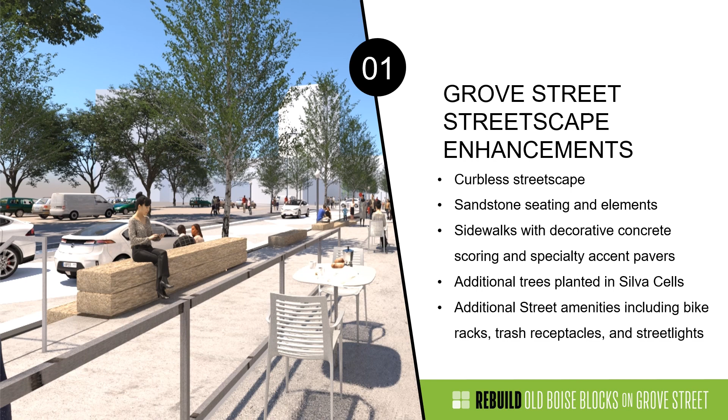We are working in partnership with the Ada County Highway District. We have an agreement with them where we do the construction and they reimburse us for it. In this case, we'll be removing the existing asphalt paving and replacing it with concrete paving. The concrete will reduce future road maintenance—it's going to last a lot longer than asphalt, so we won't have chip sealing and all that kind of stuff, which means a lot less headaches going forward. Concrete also helps reduce the urban heat island effect, which is a good thing these days.

One of the other things we're doing, like you see out here at 8th Street, is what we call a tabletop or raised intersection, where the intersection comes up slightly compared to the adjacent roadways. This helps slow down vehicle traffic speeds, and we bulb out the corners to bring the crosswalks closer together, reducing travel distances for pedestrians. Going all down Grove Street—5th, 4th, and 3rd—we'll have those conditions to improve safety on that corridor, into the west end and east end as well.

Another cool thing about this partnership is that we're doing something the Highway District would never do on their own—we have the ability to do decorative concrete scoring and coloring. In this case, we're doing diamond accent paving, similar to what's on the Bass Block, as a tip of the hat to the history down here. So a lot of cool stuff coming up with paving.

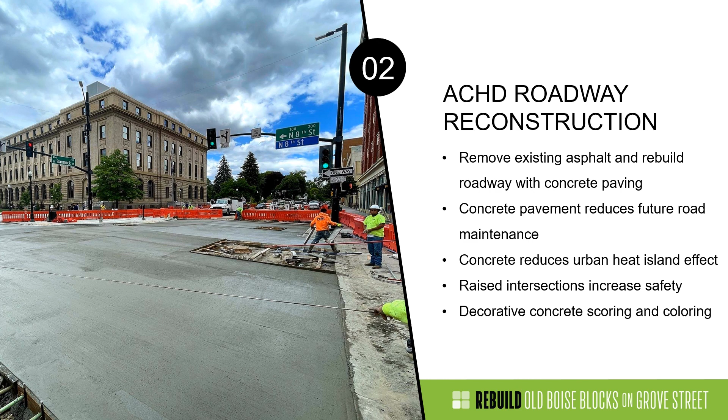We're doing utility upgrades, the first of which is the Veolia water line replacement—that's the main line from 6th to 3rd. Anthony can talk more about that in a minute.

We're also doing, as mentioned, the Silva-cell technology with the trees. That's great for tree growth, but we can also dump stormwater into them, which waters the trees and also allows the water to percolate down, get filtered, and go back into the aquifer to recharge and keep that whole cycle going. From a green stormwater infrastructure standpoint, that's a super cool thing.

And we are adding critical linkages to the City of Boise's fiber optic network. This will help reduce broadband costs and increase network speeds.

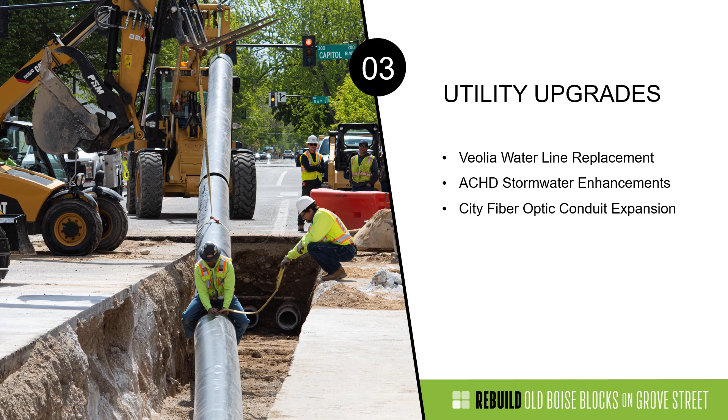One of which, on the bottom of the screen, are bronze inlays. They're 12-inch diameter, there's 10 of them, and they march down the street, set into the sidewalks. The artist who designed these is Mungo Lagoya, and what he did is include the national flowers of different countries which have historically been present in the neighborhood. I think it's a really wonderful way of celebrating the history and culture of the neighborhood.

The second is an art installation/barrier adjacent to C.W. Moore Park water wheel. We have the good fortune of having the artist, Bobby Zokaites from Arizona, who's in Boise this week to meet people, check out the site, and start work on that installation. We're really excited to continue the tradition of public art in downtown Boise.

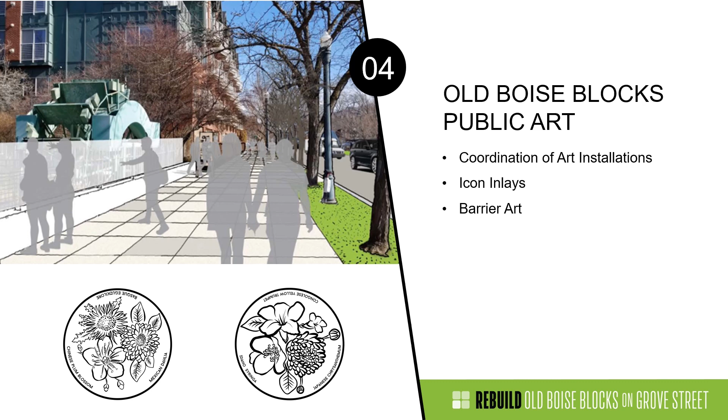We're working with the Boise City Canal Company. The canal company, I think, goes back to about the 1860s, where it was the Boise City ditch. It goes back to the agricultural heritage that we have. The canal is in pretty serious need of upgrades. We're going to rebuild it from 5th to 3rd Streets, which will increase its life by about 100 years. Similar to the image on the screen, we'll take out the old failing canal and replace it with a new PVC piping system.

The canal has a window of inactivity from October to March, so you have to work on it when there's no water in it. That actually just got turned off for it a couple days ago, something like that. So we're getting to work on that soon, and we'll have it wrapped up by spring so nobody gets all wet when they turn it back on.

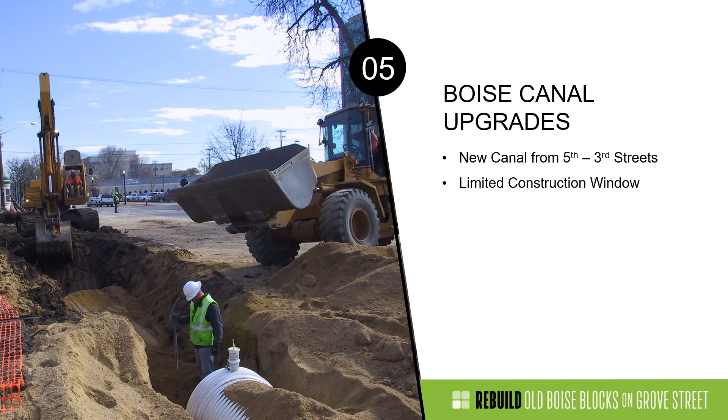The last of these sub-projects, during our outreach efforts, we worked pretty extensively with Department of Labor. You can see on the screen in red there are 6 curb cuts that serve vehicular circulation into the parking lot. They've been willing to get rid of those so we have a continuous streetscape, with a lot less of that vehicle-pedestrian conflict and safety issues.

As part of that, we need to redirect traffic off of 3rd and 4th Street, like you see with the green arrows, to serve that parking lot, which means we need to reconfigure the circulation within the parking lot. The Department of Labor had some maintenance and resurfacing that needed to get done at the same time, so we said, let's work together, we have a builder on board, we can do this work for you and you can reimburse us. That's a big win for safety down in that area.

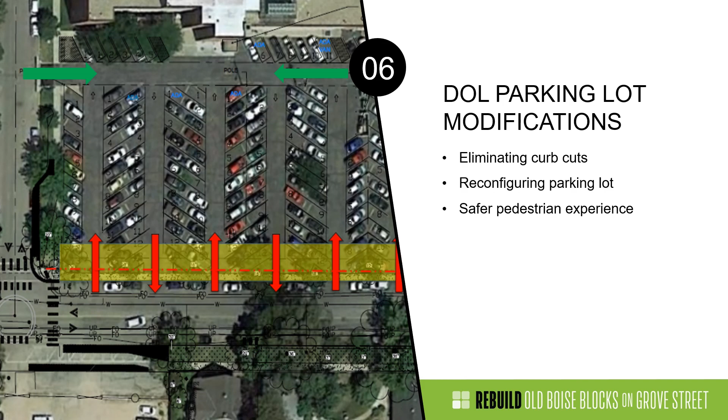That's the collection of projects we're undertaking as part of the rebuild of the Old Boise Blocks on Grove Street. I'll let Anthony get into more of the construction specifics.

Thanks, Carl. Running through the phasing on our project, we're planning on starting October 30th, like Carl said. We have a limited window of time that the canal is inactive, and now that the water's turned off, we can start reworking the canal. October 30th we'll start, and our current plan is to start at 6th Street.

In order for the canal work to happen, we have to relocate some water lines and upgrade those, like Carl was talking about. That's a separate project underneath the overall project with Veolia, so we're coordinating traffic control and phasing with them. They'll start upgrading the water lines at 6th and work their way towards 3rd.

So for the first week on the project, we'll be between 6th and 5th on Grove, replacing the water main. During this time, or before that, we're working on reconfiguring parking lot access for the 3 parking lots south of Grove. Currently there's a curb between the parking lots and the alley. We'll demo that curb and patch it in, so those parking lots will have access from the alley during the construction phase.

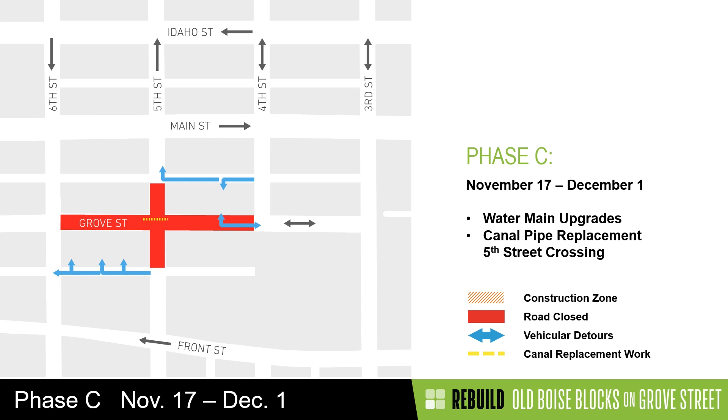Then once we're through the 5th Street intersection, 5th Street will be closed, and then we'll open 5th back up to a 1-lane travel lane. The goal is to have that open back up for the first of the year when the legislature gets in, and then keep 5th Street 1 lane open until they get out, hopefully middle of April. During this time, we will also be working on the canal from 5th Street all the way down to 3rd.

That's the map. We'll be doing pipe upgrades, and the crossing at 4th Street, due to some elevations, is a concrete structure, so there's quite a bit of work at the canal at 4th Street. During this time also, we will be starting the upgrades of the streetscapes and the road from 6th to 5th. Due to some scheduling and different constraints, we'll start building the road first from 6th to 5th, and that will happen during that early December timeframe.

So back to the January through April timeframe, that's when 5th Street will be opened 1 lane, and then work will be happening on Grove from 6th all the way to 3rd. We'll have local access to the gravel parking lot and a few business accesses on the 4th to 3rd section. There'll be local access for them to come in off of 3rd and access those parking areas. But during this time, we'll be doing the canal work and also doing streetscape improvements.

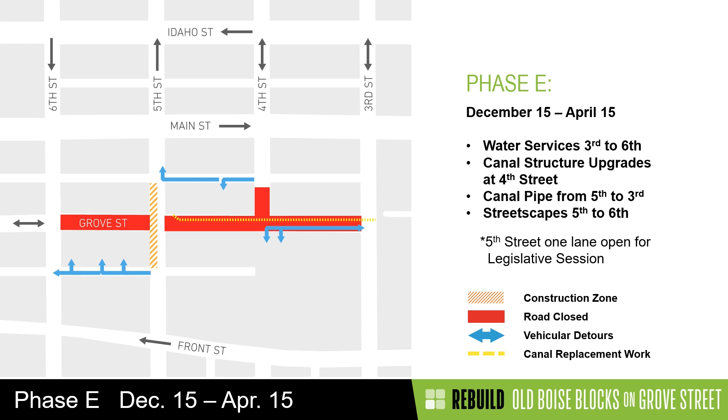So then April 15th, or when the legislature gets out, is when we're able to close 5th Street to pave it. And like Carl was saying, the current design is all concrete paving. So we'll come in there and excavate out the road and then place the concrete, doing that from April 15th to roughly June 1st.

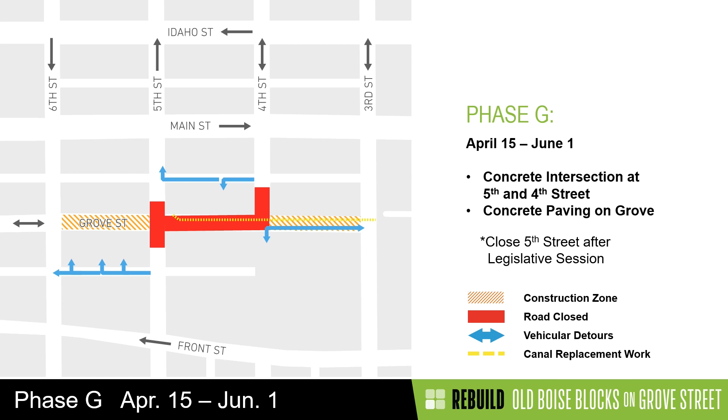We'll pour the 5th Street intersection, we'll pour Grove from 5th to 4th, and then the 4th Street intersection at that time. Once that's cured out and we're able to put traffic on it, then we will do the 4th to 3rd section and pave that. At this time, the gravel parking lot will have access off of 4th, so minimal disturbance to their access throughout construction.

In that June 1st timeframe, everything will be done west of 4th to 6th. So starting to get back to normal, and all wrapped up by the end of July is the plan.

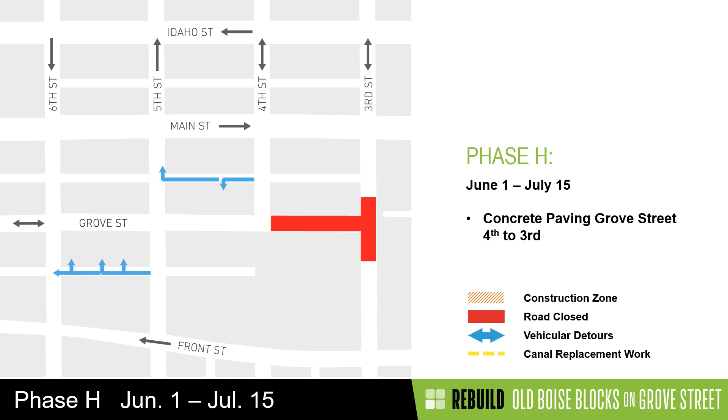So we've got the contacts. I'm the construction manager on the project. Rob Clonger is my senior superintendent. He's out hunting this week, so he wasn't able to make it, but he will be boots on the ground. He'll start going business to business and establishing contacts and relationships and forming those lines of communication.

He's the main contact if there's any day-to-day questions on access, or if there's any special needs with, say, a delivery or something. He'll be the person to get with, and he goes out of his way to accommodate and try to minimize the impact of construction. I've got his card back there, but he'll be going business to business and meeting with everyone here in the upcoming weeks, so be on the lookout for him.

Communication on these projects is key. Let us know if there's something coming up or if there's a concern. The more we know, there's a lot of times we can push and pull things and do our best to accommodate different things. The team's done a bunch of streetscapes together, so we have a pretty dialed in process, and we look forward to having another successful project.

Anthony, I may have missed it. Can you specifically tell me when the streetscape between 5th and 6th starts and ends? Just the streetscape improvements. That's a loaded question.